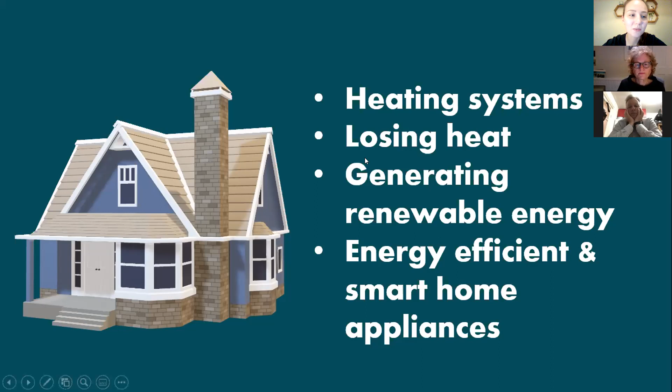Something to consider. But what we will be focusing on today is really mainly the fabric first approach and fabric efficiency. So these are 4 areas that we're going to be looking at in some detail if we're talking about retrofit, and those are where we lose heat from. The biggest place we tend to lose heat from is the walls. Please do pick me up on this if I'm wrong, David, but I believe it's about 35% of heat loss in homes is from our walls. After that, we've got heat loss from our roofs or our lofts, and then also windows and gaps around doors and different areas that aren't sealed. And finally, our floors, where we lose 10 to 15% of our heat.

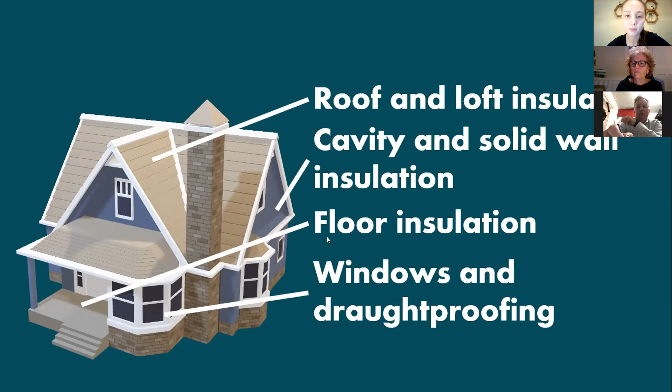So just before we get stuck into the details of retrofit, and David will go through some of the more technical aspects that I can't cover for you, a little bit about who South East London Community Energy is. Well, we were set up back in 2014, quite a long time ago now for a community energy group. We were set up by a group of local residents who had this vision or mission in mind: a low carbon future where everyone has access to affordable energy and has a say in how that energy is produced.

As we've gone through the years, most of our work has been focused on supporting schools to go green with solar panels. We've also ventured into supplying LED lighting for community buildings, and now energy advice for businesses, in addition to our work on the Future Fit Homes programme, which I run. Our fuel poverty alleviation work is one of the busiest and biggest areas.

Throughout lockdown, we have more than doubled our team size to support homeowners and tenants in London who are really struggling to choose between paying their bills for heating their homes and putting food on their tables. And you would be surprised to find out, or I was very surprised when I found out, that actually South East London is one of the worst areas in the whole of Europe for fuel poverty. So we've been really busy over lockdown trying to tackle this issue.

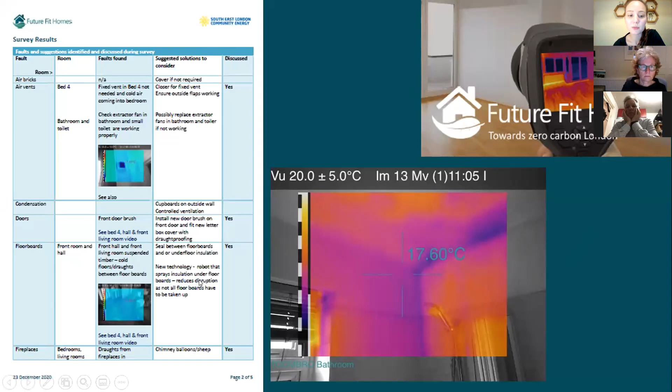This is one of our services, which is the thermal imaging survey. This has been really popular over the past few months because you can literally see exactly where your home is leaking heat from. You also get a video and a report afterwards with photos on what corrections you need to make.

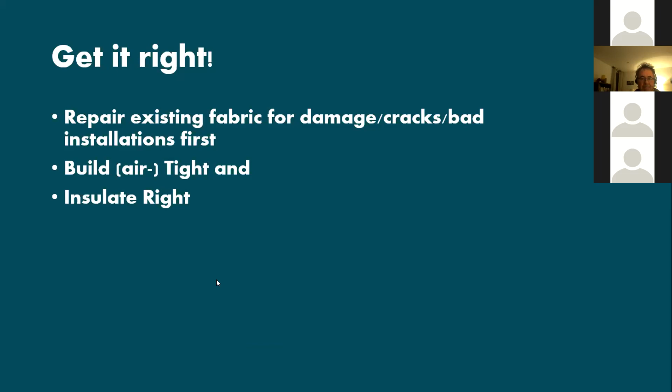External wall insulation: obviously the walls lose the most heat because it's the biggest space. It has the most space in terms of where the heat loss is going through. So it's much easier to do external wall insulation than internal wall insulation. There's no decanting of residents. They don't have to move out. It's all done externally. Scaffolding is put up, but there are certain things you have to do.

You have to make sure you have sufficient overhang of the roof, and that the whole process is done properly. All of the services and the external pipes and down pipes, it's all refitted properly, and you have to make sure the detailing is done properly. Sometimes you might have to have planning permission, but not really. And the actual external change to the building is not really significant.

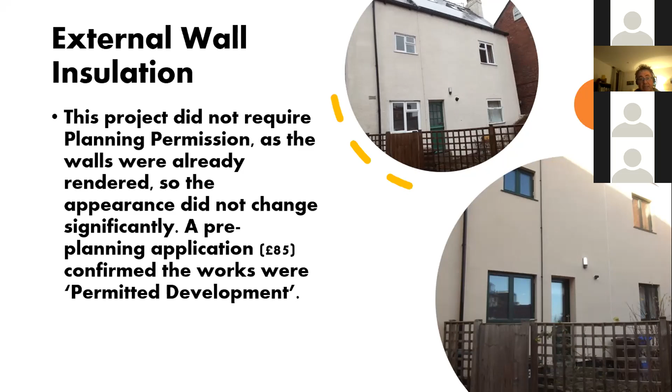Some people prefer brick slip. You can have brick slip, but it costs an enormous amount of money. But external wall insulation is the way to go, and there's less risk with interstitial condensation. It's less risky, and it allows the building to breathe better. Carry on. Internal wall insulation is inherently more risky.

It requires redecoration, moving of plugs and sockets and skirting boards and architrave, and then the redecoration, and it often requires people to move out. It's where you can't do external wall insulation, then you have to do that if you're going to get a really good performing fabric.

So there's vapor open or vapor closed. It depends on the evaluation from the retrofit coordinator as to whether you go for man-made or natural products, and there are different fixing methods to that, but it's a lot more hassle than external wall insulation. So wherever you can do EWI, do it, not IWI, but in certain cases you can't.

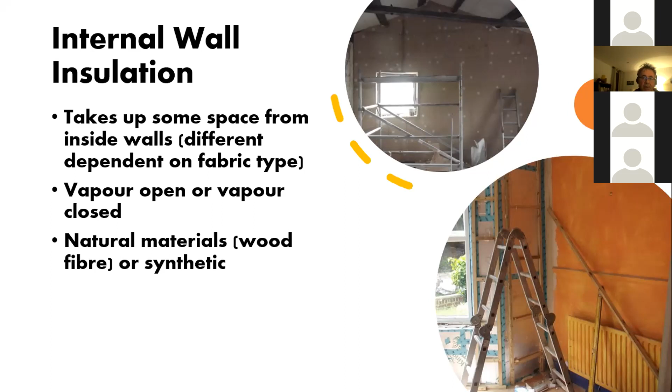Most of the problems with thermal bridging, in other words, cold spots, are where you get a junction between a floor and a wall or a roof and a wall. So the insulation has to be continuous. So you have to pay particular attention to these junctions. So there are various ways of insulating ground floors. You might have a raised timber floor or a solid floor. So, every house is different.

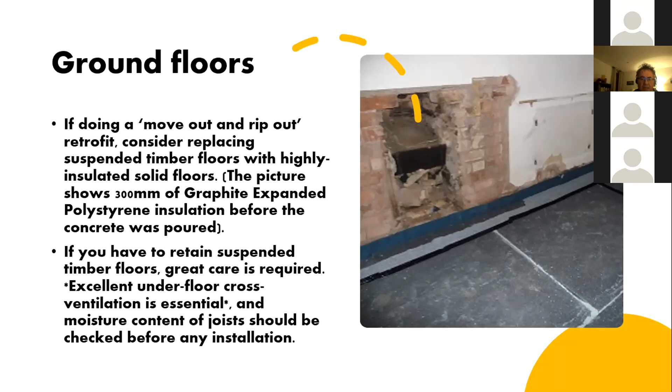And sometimes you can't actually get access under a raised timber floor. So there is another option. You could send a robot underneath it, and it will spray expanded foam onto the underside of the floorboards. So again, you can use natural fibers, or you can use man-made, and it depends on what result you want to achieve. Okay, next one.

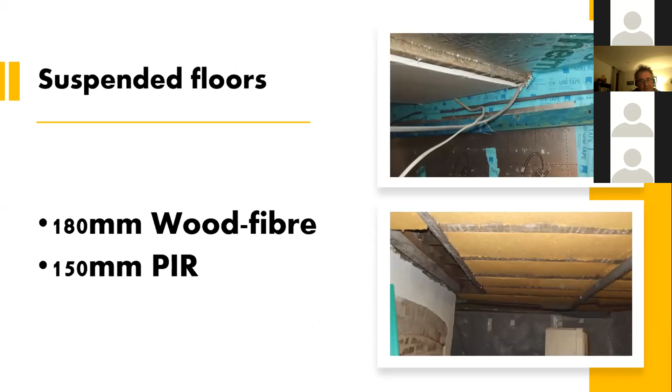You know, what would I do? It depends on the property, of course. I would draught proof wherever I could, because that makes the building less leaky. But some people just wouldn't know how to even begin to do that. But there are many things you can do, and actually YouTube is a great resource for that. There's loads of builders and manufacturers of various products that post videos of how you can do little things that would help in terms of draught proofing. So that's worth looking at.

And there's so many things like pipes that go out of the building, flues, where pipe work goes out and it leaks air in, and that's gonna increase your space heating requirement, because your building becomes inherently more leaky. Okay.

So if you're in any doubt and you're not quite sure how to approach this, then as Nadia mentioned before, we can come to your property, we can do an evaluation, have a look at the whole thing, have a poke around, look at the building fabric, look at your heating system, what ventilation you've got, and then make recommendations to you on that. It depends on budget. If we all had enough money, we would all do it, particularly if we're environmentally conscious. So simple things like radiator reflectors can save 25, 30, 40 pounds a year, depending on how many radiators.

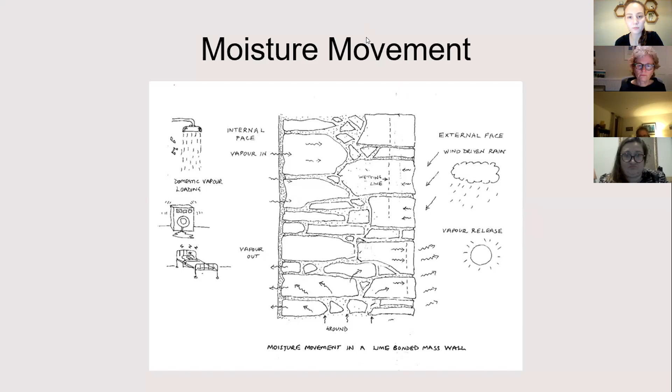Lovely. Heritage is not a barrier, as I see some of you have been saying, to reducing carbon footprint, and it should be celebrated. We have some of the oldest building stock in the world. Traditional buildings have proven themselves.

I can hear someone else.

Traditional buildings have proven themselves as resilient and durable, and they have been around for a very long time. Where carefully managed, these could stay for another hundreds of years into the future. They are categorized as pre-industrial revolution buildings, meaning that they were built during a time that occupants were low carbon users, before electrical power and central heating was available.

The global building sector is actually the third biggest source of greenhouse gases, and they are responsible for 40% of all carbon emissions. People in the sector view traditional buildings as energy poor, but this is not the case, and reusing traditional buildings is a more carbon sensible thing than to demolish and build new. Studies undertaken by Historic England show that reusing traditional and historic buildings is essential to cutting the UK's carbon emissions.

There is actually a strong argument that retaining traditional buildings, as they hold high levels of embodied carbon, will cut the UK's carbon emissions. These materials are also far more durable than modern equivalents, which reduces the frequency of repair and refurbishment, requiring less energy and carbon to maintain them in the long term.

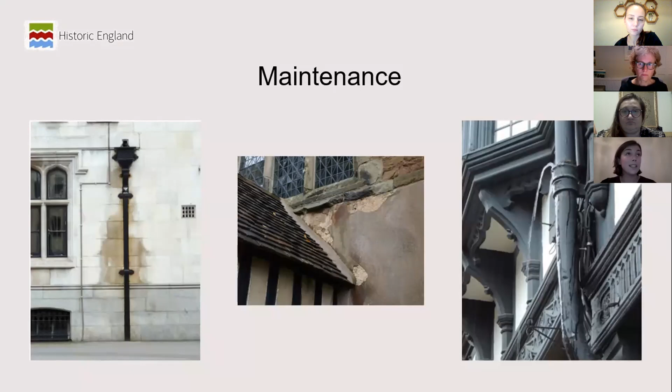Next slide, please, Nadia. There you go.

One of the biggest climate change planning risks to the heritage environment and traditional buildings is the EPC's drive for maladaptation and the use of fossil fuels, preferring to refer to energy cost rather than carbon emissions. It's important that when considering alterations to take a whole building approach and not a fabric first.

For example, if you were to replace your windows for double or triple glazing and didn't insulate your house, you will see little benefit. In fact, studies undertaken in Historic England's own offices found that altering the mechanical and electrical systems on the site made a substantially better impact on the EPC ratings and energy emissions, rather than doing extremely fabric first invasive approaches.

What we recommend is commission an EPC assessment of your building. This will provide you with a baseline of how your building's efficiency is performing, and it will offer you recommendations on what you could do. It's not the EPC that harms the buildings, but the inappropriate actions that are taken. Easy wins like draught proofing on windows and doors, swapping to LED lighting and insulating around your hot water cylinder are all very non-invasive energy improvement measures, and they do not require detailed design.

Installing insulation in the loft, as long as thermal bridging and ventilation is considered, is also a fairly easy solution to install. Where your building needs more extreme measures, such as wall insulation, to improve its energy efficiency, time should be taken to assess and inform the decision process. Homeowners and consultants should consider each element of extreme measures and what impact they will have on the building's natural performance. It's not as simple as going to the shop and buying off-the-shelf insulation, I'm afraid.

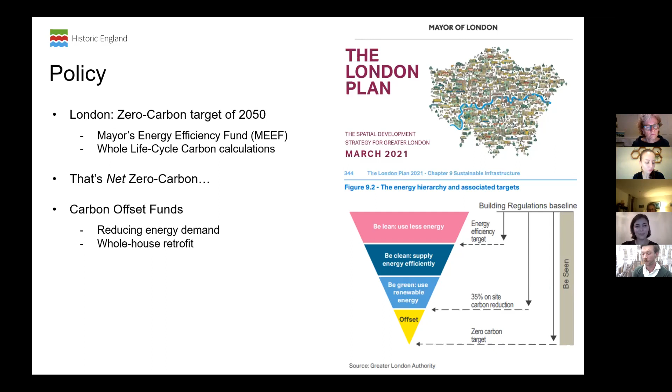So far, the funds haven't been getting disbursed enough because retrofit efforts are generally quite sluggish. But the mechanism is embedded again in the new London Plan, and the guidance states that its main priority is to be reducing energy demand in existing buildings, and another priority is whole house retrofit. So there's a potential source of funds embedded in London planning policy.

So I'm not going to talk about listed buildings in heritage, because that's a whole different discussion, really. I would like to make the case that conservation areas, though, could and should be a priority for our retrofit efforts, and that they're a really great place to do retrofit sensitively, and might be a good place for those offset funds to go. So first, let's try to characterize conservation areas geographically and by building type.

So considering their structural properties more than worrying about their style, we can say that around 30% of English houses have solid wall construction right into the 1930s stock. And these will be the homes that compose the overwhelming majority of conservation area houses.

Now, Joanne has already made a large part of my case about conservation areas for me by explaining how positive the properties of these traditional buildings are in terms of breathability and moisture control, the methods and materials that are used to build them, so timber, masonry, lime, solid walls. These typically have low levels of embodied and high levels of sequestered carbon. So these are typologies which hold lessons for how we need to build now and in the future. Learning how to retrofit these buildings, I would argue, will give us the skills and knowledge we're going to need.

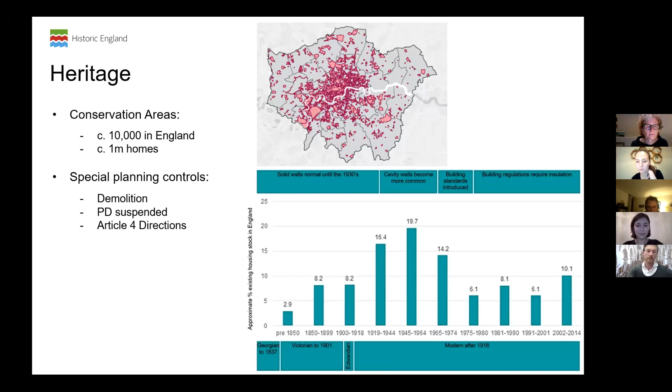More good reasons come from design. The government's latest planning reforms establish making beautiful places as a policy objective for the first time. And this is very much based on contextual character and appearance. This is what conservation areas are for. The legislation that controls them says they are areas of special architectural or historic interest, the character or appearance of which it is desirable to preserve or enhance. So retrofitted conservation areas are, in a sense, the policy model for a sustainable and beautiful urban future.

So much so optimistic. I do, of course, want to acknowledge that there are special challenges that conservation area retrofit faces. And I'll just mention a few in brief because I know this is going to be part of our discussion later. For example, because of the history of urban development, conservation area homes are more likely to be flats or terraced houses. So one study suggests around 35 and 34% respectively of homes in conservation areas are flats or terraces, compared to more semi-detached and detached homes on average across England outside conservation areas. So living in close quarters with shared walls and floors can make retrofit trickier.

Another challenge is that local planning policies and guidance remain weak on climate change adaptation in general. There's a lot of work still to do. Some London boroughs have lately added sustainability to their conservation and design officers' titles, but by and large we, and I count myself among these people, are not retrofit specialists, but we tend to be conservation specialists. And conservation area appraisals which address retrofit are very rare in my experience. So there's a skills gap amongst decision makers, as well as amongst crafts and tradespeople at the moment, because we just haven't been doing this enough yet.

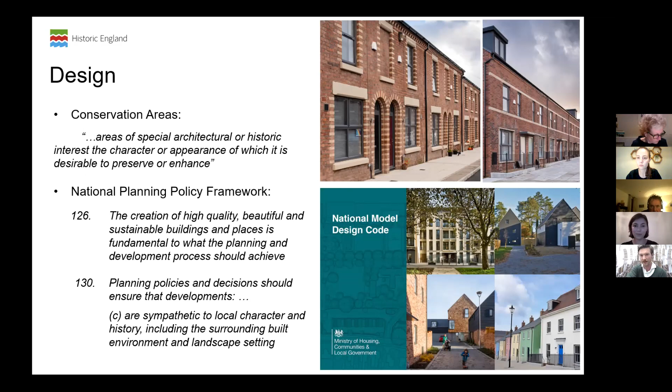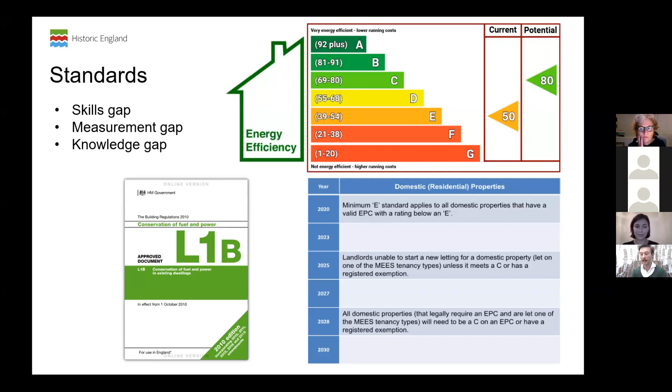Building regs, Part L, are also a little bit out of date in that they were prepared at a time when the energy grid looked very different, and they suffer from the same problems of the way they measure and the intrinsic biases they have. So they're a limited guide to what we need to do. All of this translates, as Joanne also mentioned, into a lack of up-to-date knowledge amongst insurers, for example, and mortgage brokers, and so higher premiums and borrowing costs potentially, and sometimes bad advice unsuited to traditional buildings.

Increasingly, there's no excuse for this, because I just want to point out some of the freely available data on conservation and climate change, which is starting to far outstrip the state of planning and industry responses to the need for retrofit. And just a few online data sets here that are freely available for you to use.

One project called Colouring London is a UCL effort to map London's building ages. That's fantastic in the bottom left there. And there are two GLA interactive maps shown here as well. The London building stock model, which they've built in collaboration with UCL, which shows building by building data on EPC ratings. And the climate risk map in collaboration with Bloomberg, which tries to map overheating and flood risk, so various kinds of climate change risk. Amazing resources, and they're free online.

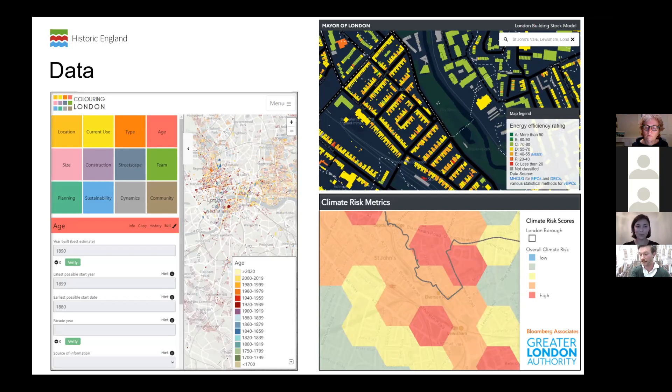As to practicalities though, sometimes the research is old, it's often esoteric, sometimes very academic. For instance, I found a fascinating study called Low Carbon Retrofit of a UK Conservation Area Terrace, introducing a pattern book of energy saving details, which sounds excellent, but it's an academic paper on a one-off project, and it's 11 years old now. So there's still a gap.

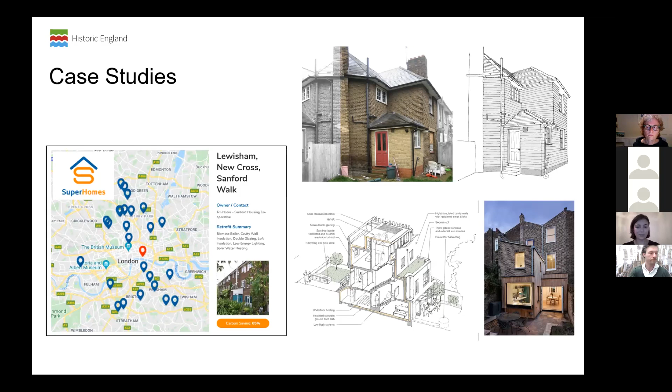Which brings me to my conclusion. In London, we've seen that the big picture is that policy is beginning to support coordinated retrofit programs. The Mayor's retrofit funds are potentially growing and unspent generally. And also we've seen that conservation areas are an invaluable resource full of traditional buildings and materials which we need to develop retrofit skills for the future and to design new low carbon places.

Better still, conservation areas group buildings together, batched up into parcels which tend to have similar histories, materials and types. They have similar planning controls and even similar climate contexts. Conservation areas are therefore perfect for potentially developing carbon and conservation sensitive transferable toolkits of skills and pattern books of working details. We just need the projects which will try and do that.

Both retrofit and conservation have this in common. Good practice begins with a holistic understanding of the building and of its context. And there is abundant heritage expertise and knowledge specific to every conservation area, not least council conservation officers and conservation area appraisals. So I hope we see more collaborative experiments with retrofit within the helpful and healthy constraints and the community of building types that conservation area designation provides.

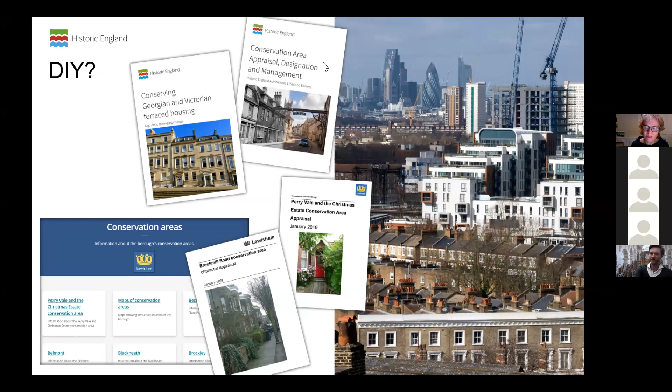Alfie, thank you very much for that really useful and insightful talk, and even, dare I say it, shades of optimism in terms of potential benefits and assets that conservation areas might represent in this area, and even attract offset funds, who knows. But really, really interesting.